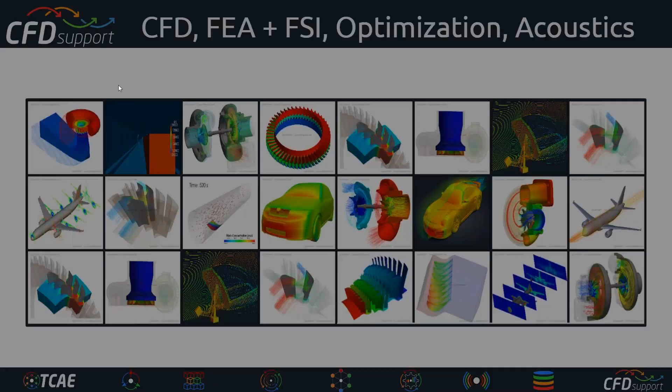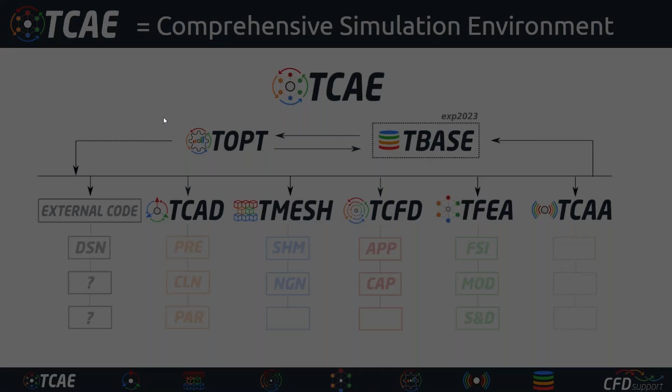We develop software, which we call a simulation environment. It's called TCAE, and it's a system of software modules which are extremely flexible. Anyone can play his own game with them, create a unique workflow, and use it together with whatever it comes at hand, which means it can be well synchronized with commercial codes, in-house codes, and other open source pieces. It's really very flexible, and that's what we do here.

TCAE is completely unlimited, which is very important, so our users can use it without any limitations on number of users, jobs, cores, or hardware installations. Our users can use their software, and especially hardware and manpower, to the fullest. What's also important is TCAE is focused and accurate. I'm not going to go too much into details.

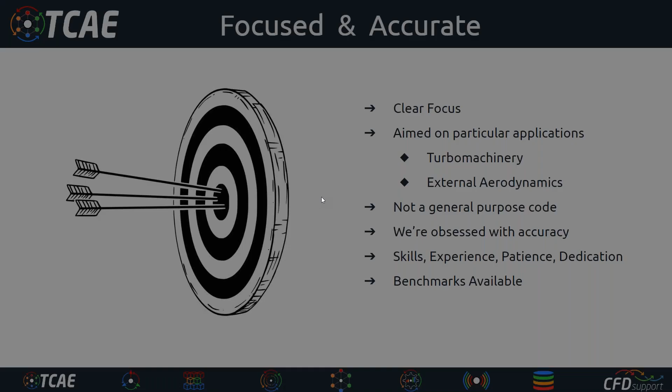It's perfectly automated, and what's very important is TCAE is based on open sources—more than 60 open source projects made together, which communicate well, and all that creates a unique simulation environment. This is, of course, put into a graphical interface which is smooth and developed for Windows and Linux, and there are many other benefits.

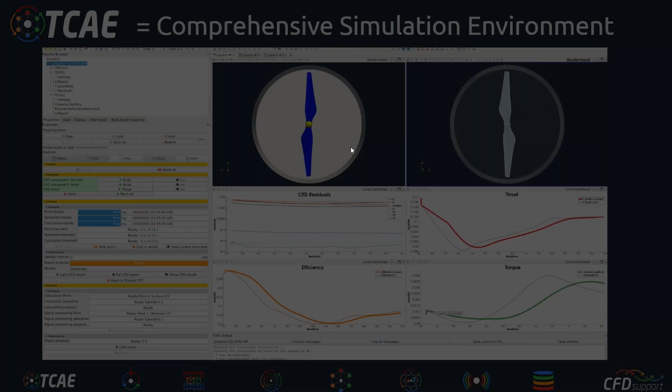I would like to go ahead with an invitation, because we are just before the release of the new version, which will be released in two weeks. So I would like to invite you to that webinar. The new TCAE version 23.03 will be introduced in webinar 66 on Thursday in two weeks, and it will be our pleasure to show you all the stuff we have there. Again, a lot of time and effort has been spent to deliver the best version ever.

Okay, which brings me to the topic of today's webinar. As you know, or as I guess you know, we have put the graphical interface into ParaView, and we have used ParaView's ability, or capability, to work in client-server mode. We also made it available to run the simulations in this client-server mode, and it shows to be extremely effective because it allows the users to...

...wherever they are, use their resources extremely effectively, because, if I simplify it, they can connect from any machine to another machine in this client-server mode. The user is the client side, and the resource—the simulation resource—typically is the server side. So from the client to the server, you can make a connection and use TCAE in a way as if sitting at the server.

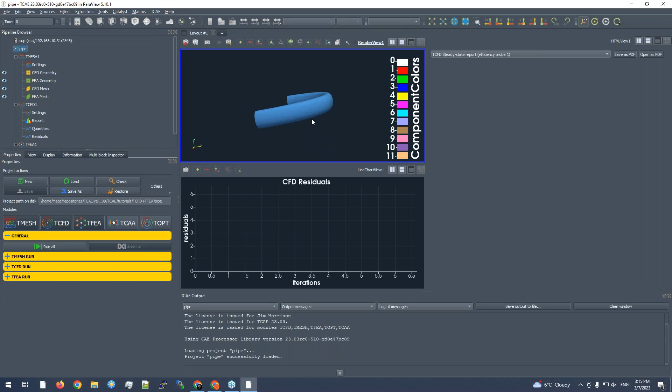Maybe for the second scenario, where we connect to the cloud, which has just a virtual machine without a graphical interface or without graphics, in that scenario it just sends you the data, and the rendering is then made on the local side. So maybe we can compare the speed of the rendering.

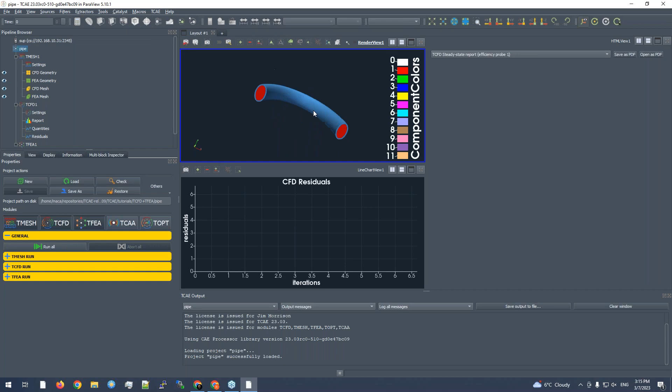You can see that it's pretty fast. Now what we can set is, for example, number of processors. My computer has 32 cores, so I can set 16, even sitting at the laptop. And for the TFEA simulation, I can set also 16, for example.

So let's go here, I will save my setup, and now I will run the simulation. Everything is happening. I've set just 16 for the solver simulation, but not for the meshing, so now the meshing is done on 6 processors.

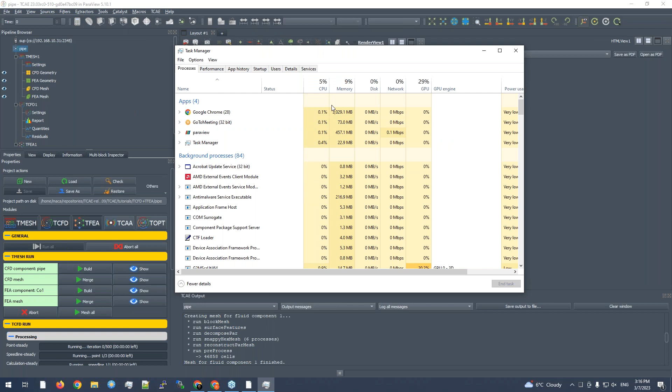And if I check the current usage, you can see on my local Windows machine nothing is happening, the CPU usage is almost 0. So everything is happening on the server side, and all the information is gathered here.

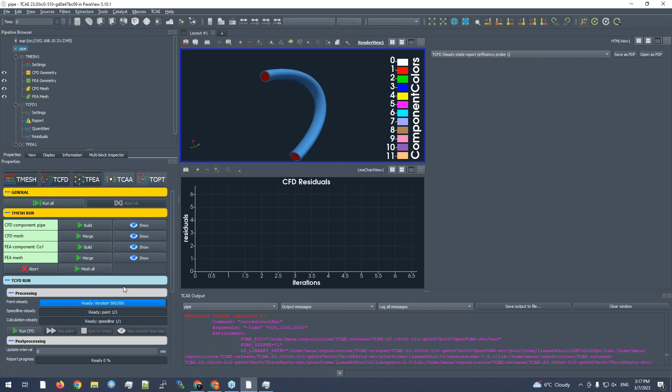Okay, so the mesh, I have some issues here, maybe I've loaded... okay, all right, let's try it again. Maybe I've loaded some example which was already somehow broken, because we played a lot with the tutorials these days, so I'm not sure exactly what happened.

So maybe we can try another tutorial. Let me delete it, I will close, or directly delete everything, and maybe open a new TCAE client, and let me open a different tutorial. Okay, I will do the same.

Again I will delete this, I will connect to my already preset server, again I will put the IP, then I will connect there and open a different tutorial. So keep your fingers crossed. TCAE release, the latest one, tutorials.

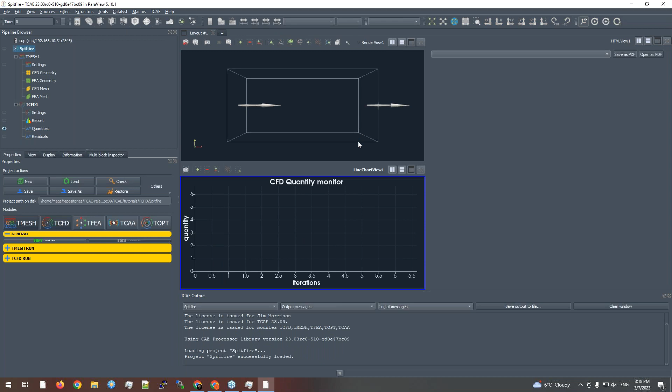So let me load this file. Maybe we will not see the result, but at least we will see the workflow running on it. So this is some external aerodynamic case, it's external aerodynamics of the Spitfire model.

Let me quickly run the solver. Okay, let's try to run it on the full set. Here, save my current setup. Project saved, check the case to be sure. And okay, now I will run the simulation. Maybe this case is a little bit larger, so the mesh generation will take a little more time.

So meanwhile, we can connect to the cloud. Let's show the second scenario. Here we have an account on Microsoft Azure, and here we have run one virtual machine with 4 physical virtual cores, so we can connect there and run a simulation on 2 cores.

If I go to home, yeah, this is our virtual machine, and in the networking we have available the IP address, and we have allowed the SSH connection there to connect directly to our virtual machine. So in Windows I can use, for example, this PuTTY system for SSH connection, just to connect there and run the PV server. Here is the IP address of the virtual machine, so let's connect there.

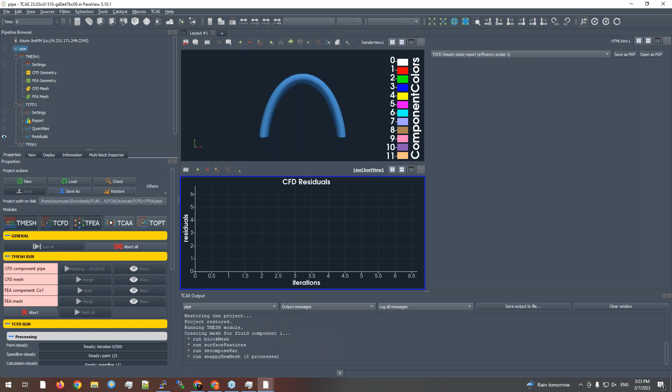Again, because I'm still connecting there, the standard output is running on the server. So everything is running on the server, but the data of the current state of the simulation is sending to my client side.

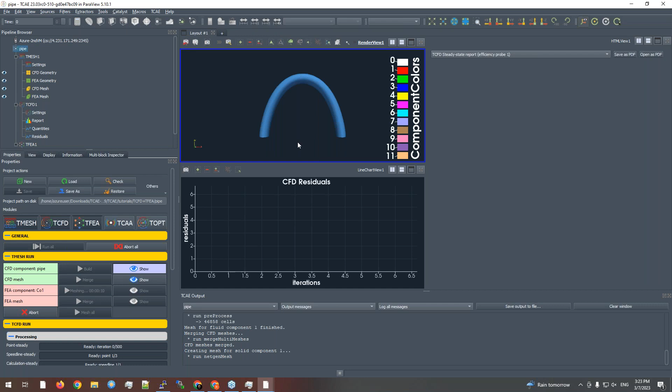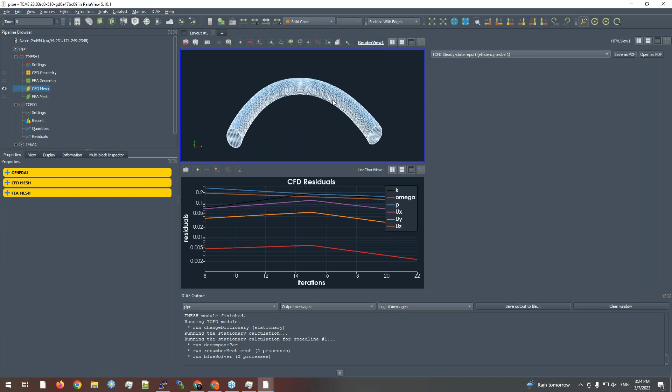You can visualize the mesh as a standard, and you can see that the rendering now is a little bit slower, because it's just sending the data, so there are more data packages, so it will take some time. Then you can directly visualize, for example, the current mesh, and as you see, the simulation is running.

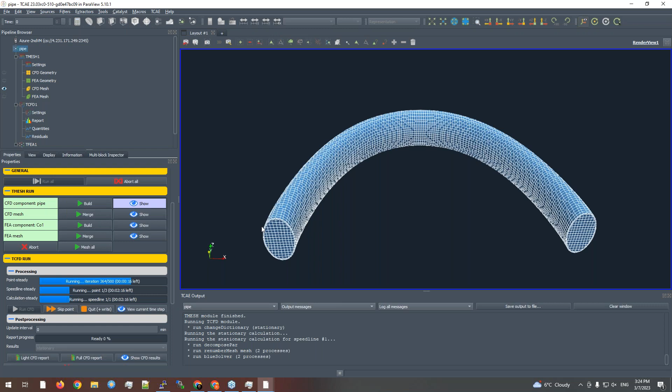And again the progress and everything is updated here. Finally, maybe we can wait for the result and show the result. So everything is done on the server side, and I'm sitting on my client side. I don't need any remote desktop control or something like that. I can do it directly via GUI.

Let's check the Spitfire, it's still okay. The mesh is pretty large, I guess. Okay, it's almost at the end.

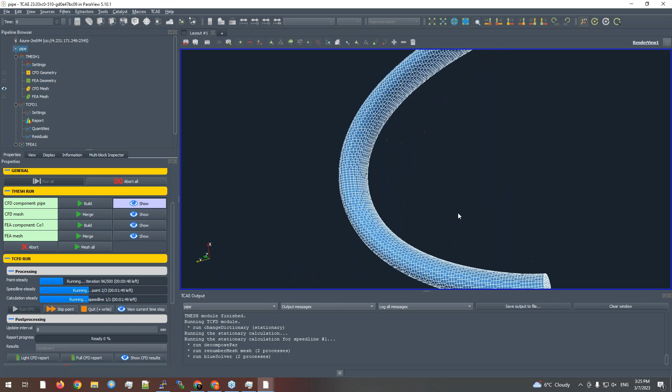I think the first component will be done, so maybe we can see that the rendering here is much faster compared to this one, as sometimes it's a little bit, it freezes a little bit, so it's not so smooth like when applying rendering on the server side with the graphical card.

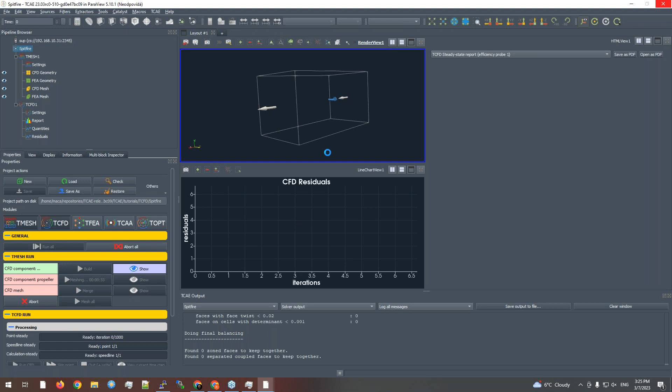And also it depends on the connection speed. So basically it's two main things which influence the connection speed and these visualizations. Now I can visualize the mesh, which has, I guess, several millions of cells. Even sitting on an older laptop, I am able to visualize large meshes because of this client-server approach.

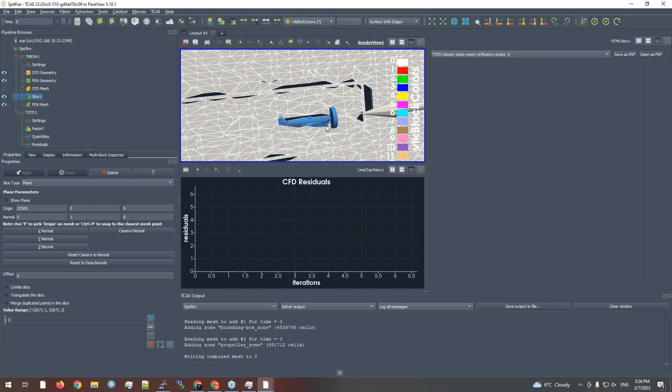And you can play with the mesh visualization like normal. You can do slices, you can do any visualization, you can do what you want. Let's, for example, visualize the mesh. Basically we can do everything you need.

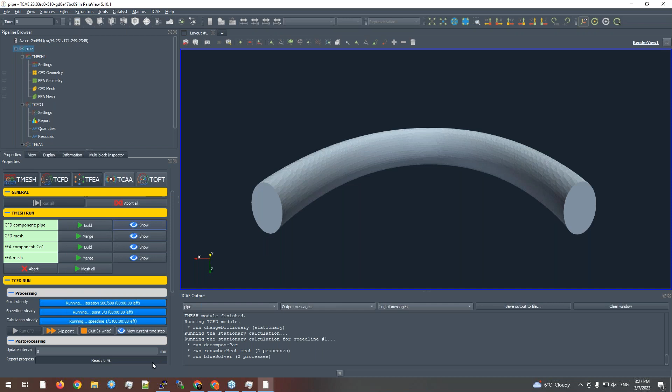Okay, still computing, but maybe I can show the current results. So show CFD results, which are already simulated. Let's load. Okay, let me check it. All right, so maybe we'll wait for the final results. Let's get rid of it and wait.

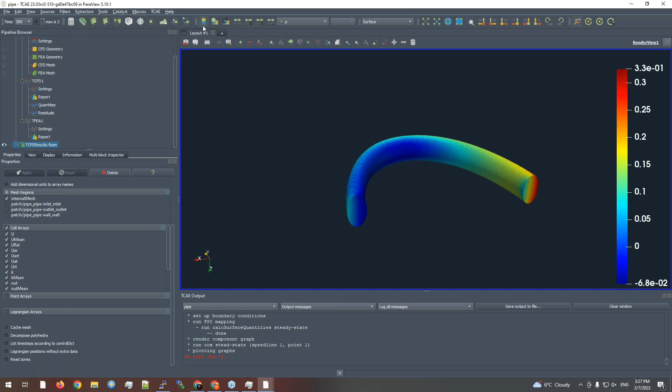Okay, so maybe... oh sorry, it's already done. So now I will show CFD results with all the data inside. Again, you can visualize directly the data which were computed right now on the server. So, yeah, that's it, I think.

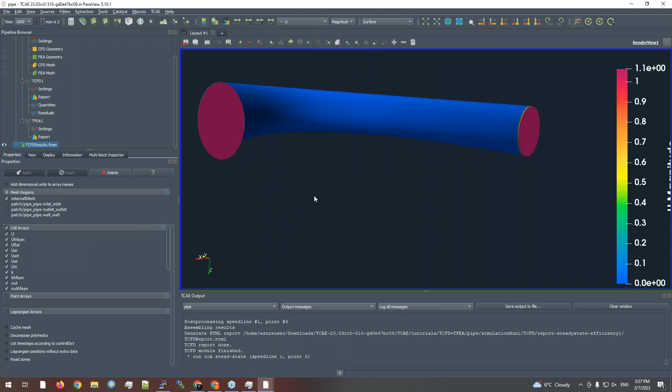All right, so I think the procedure is pretty straightforward and simple. And I think maybe it's time for discussion, or maybe Lubos will add some more information. So, I hope Lubos...

Yes, absolutely, I was waiting for you to finish. Yes, yeah, absolutely, Radek, thank you very much. It was great, it was very transparent and everything.

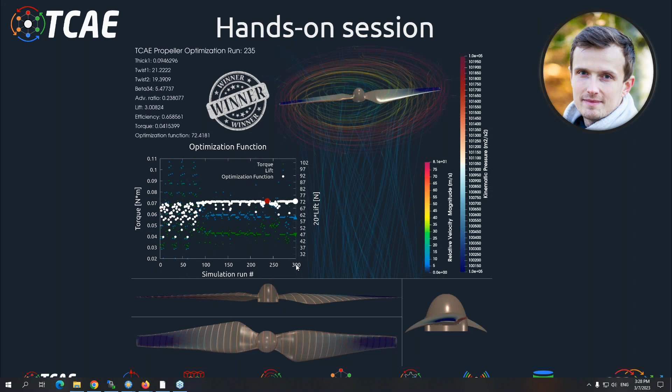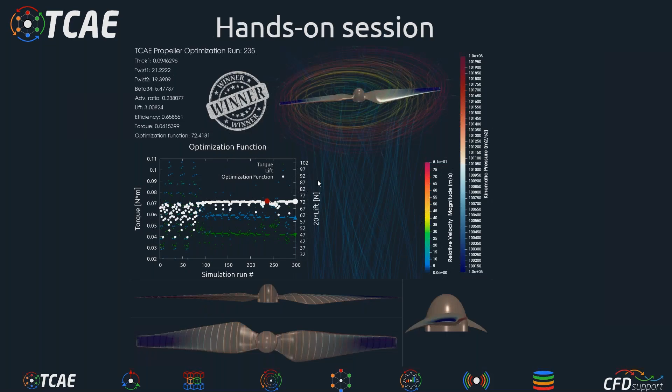So I will go ahead with the presentation. Yeah, that's it. The important message is that with this unique capability, TCAE is extremely flexible, also in terms of which resource you are using it on and where you are doing it, and how the resources are used because of their computational power, etc. Also in terms of operating systems, and also in terms of where you need to be and what resource you have currently at hand. So it's extremely flexible. It's a relatively new capability. We are definitely going to extend it so much. It's currently usable, but we will extend it even with many other features, so we believe it will be even better in the future. So that's what we wanted to show you.